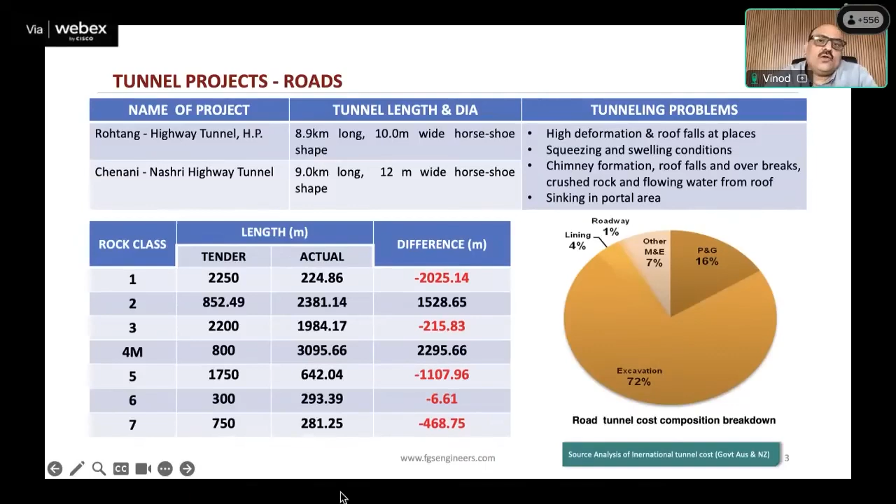Now relating this to road tunnels, if you look at the pie diagram, again from the international tunnel cost studies done by the Government of Australia and New Zealand, you'll see that the tunnel excavation cost here goes around 72%.

The difference between a railway tunnel and a road tunnel is that the railway tunnel has a comparatively much smaller excavation area required, because the cross-section size needed for a railway tunnel is much less than for a road tunnel. Hence the excavation cost percentage is around 54% for railway tunnels. But the complexities and challenges in tunneling remain almost similar for both rail and road tunnels.

In this video, you saw that as the flow was happening very fast, the lights and equipment had to be moved and cut off. Now I just want to show you the same site after rectifications were carried out.

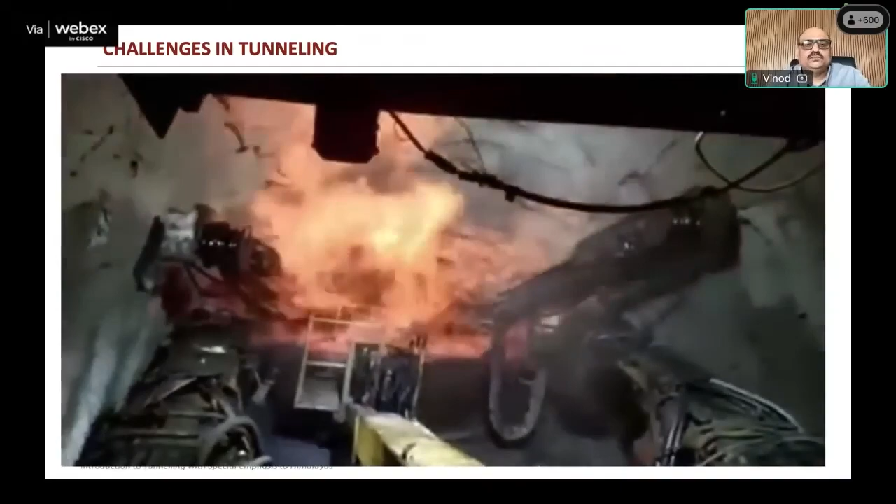Okay, so if you have seen the last three slides, what comes out of these slides is what you are going to get inside. It can broadly be anticipated, but to really infer exactly what is going to come out is very difficult.

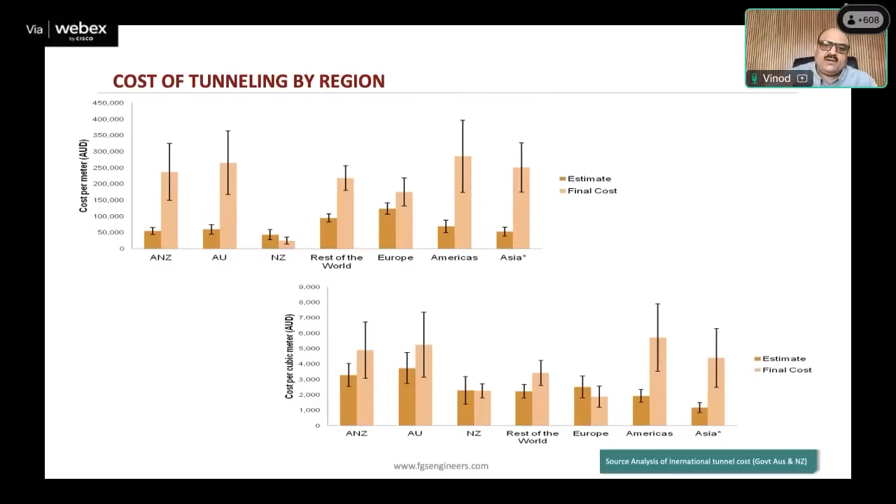Yes, if you look at the graph, this challenge is higher as far as Asia is concerned, and it is comparatively less in Europe. The reason it is less in Europe is that Europe generally has a stable geology compared to what geology you have in Asia. But all across the globe, the pattern is similar.

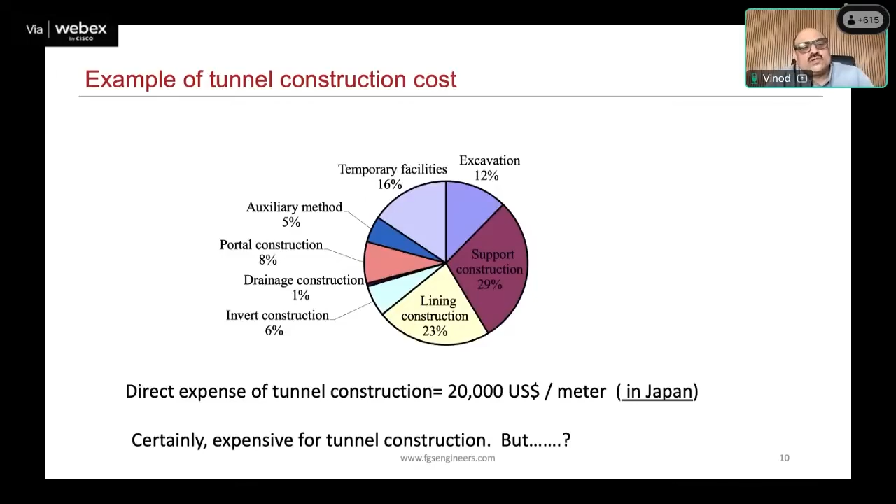Now, this is another study done by the Japanese under JICA, where in Japan they had come out with the distribution of cost. If you look at the pie chart, you will see support during construction and lining during construction. These two are the major costs which contribute to tunnel construction, going above 50%, and the rest of the costs again account for around 50% on the other side.

Now, advantages of tunnels: it definitely brings out better efficiency, environmental impact, safety, weather protection, economic benefits. I don't want to get into detail because this is something which all of us who have joined this webinar are aware of, but these are the advantages which a tunnel brings out in comparison to any other infrastructure solutions.

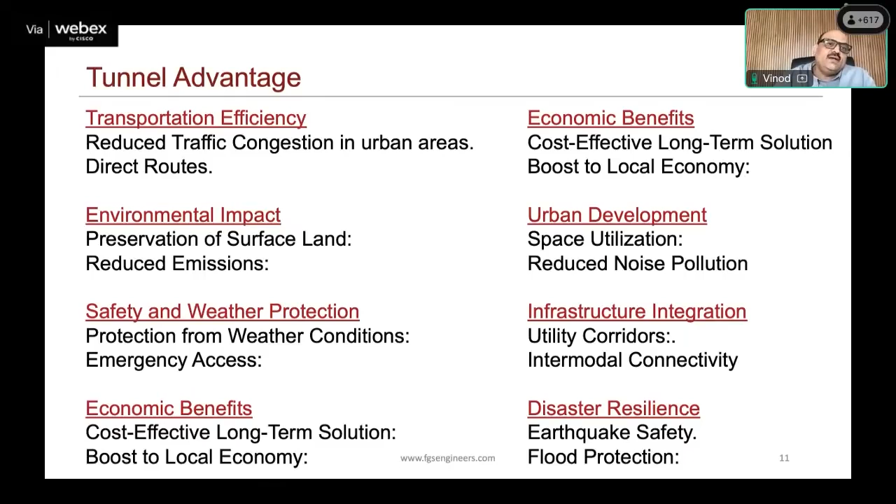Now what I want to get you to is the cost implication of tunnel vis-a-vis road. This is a study which was done in Japan, funded by JICA, and the rates are not factored to today's cost, but it gives you an aspect of how a tunnel cost and a road cost can be compared.

Now, if you look at them, they have costed for tunnel from both aspects, or road from both aspects. One is the cost of construction, second is also the cost of accident, loss, time loss, money, on account of some aspects which are intangible. So based on that, if you look at cost, the total loss which they have estimated is because of running of the road, money for running of the road, extended.

In mountain road, it estimates around 57 million, whereas in tunnel, it reduces down to 15 million. Whereas if you look at construction cost, tunnel construction cost is much higher than road construction cost, almost more than double. And then you have a larger cost for repair of disasters in case of road, and lesser in case of tunnels. And similarly, if you look at the total cost, which comes down to around 19 million, and for tunnel it comes to 43 million.

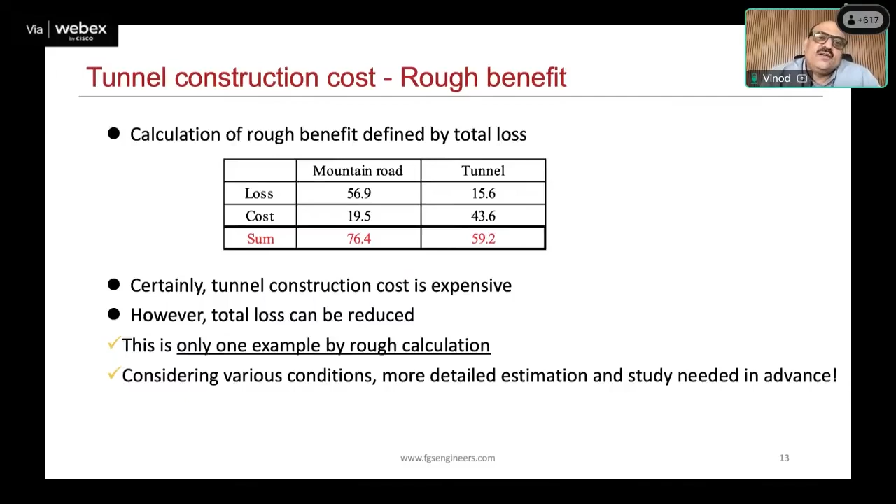But if you look at tunnel cost in mountain areas, you save a lot, especially in areas like, let us say, Rohtang Pass tunnel, where you have to climb around 46 kilometers on high hills, having snowfall, rainfall, landslides on those roads, and regular maintenance. The cost in mountain tunnels vis-a-vis a road, you can offset almost to the same. So in places which are having a lot of landslides and a lot of challenges, the cost of having a tunnel is generally offset by the rest of the risks which are there.

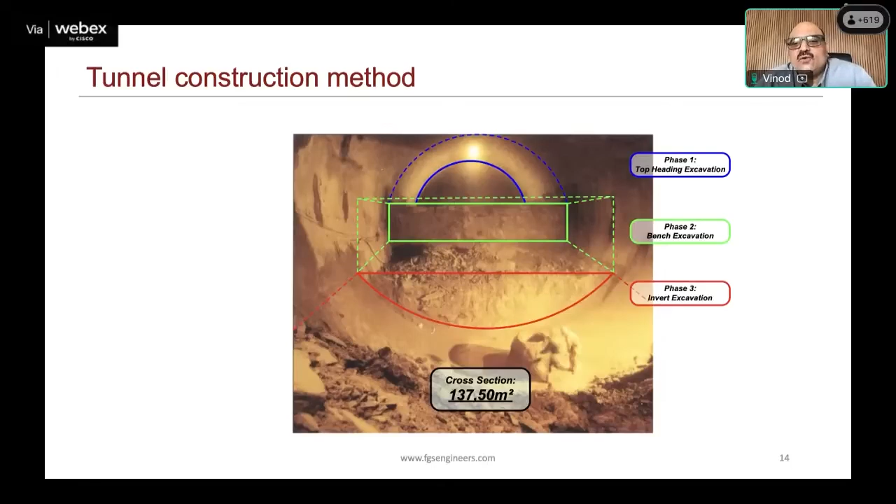If the tunnel diameter is small, as it is in railway tunnels, and it is supported by the geology, then we go for a single excavation. But in our present tunnels coming up in expressways, where the diameter of tunnel is huge, this is how we excavate them, especially when the geology becomes poor. It is divided into 3 parts. The blue part shows the top heading excavation, done in phase 1. Then in phase 2, bench excavation is carried out, and in phase 3, invert excavation is carried out.

Now we'll go over to the various terminologies. Advance, most of the civil engineers will understand. It's how we move ahead in a day. It can be in one work cycle or in 24 hours. So that is the advance you take when you excavate a tunnel. Adit, it's a word which has come from the hydro sector. It is access divergent to intake tunnel.

Commonly, when you have longer tunnels, let us say tunnels of more than 5, 8 or 10 kilometers, the tunnel has only 2 faces for construction, at both the portals. Now, if you start constructing a tunnel 10 kilometers long from 2 portals, it takes a lot of time for the construction to get completed. So in order to have more faces, adits are taken into consideration. So that is access divergent to intake tunnel.

Then is cover, a very critical aspect in tunnels. The cover is above the crown portion, or the roof. Whatever distance we have up to the mountain top, that is the cover, and that's the vertical cover. Similarly, in tunnels there is one more aspect, lateral cover. When you are driving a tunnel through a mountain, you should also be very concerned about the lateral cover you are getting. Otherwise, your tunnel will get exposed and the whole thing will collapse.

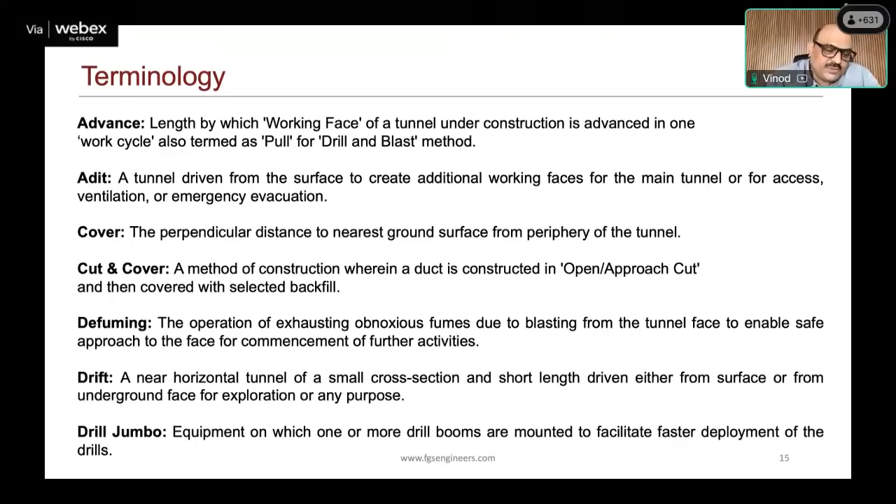So generally, because of the cross sectional area, when these equipments are selected, the decision of the contractors is not only the using of this equipment for a particular project. They also look into the employability of these jumbos for their upcoming projects or maybe the future projects. So that is one of the aspects which is taken into consideration.

Then we have egress. These are the small tunnels which are parallel to the main tunnel, and which we generally, in a common terminology, call escape tunnels. So there are egress tunnels. Then heading benching, I've already explained. Mucking, very simple thing. After blasting, when you take out, that's the mucking. Then you have shaft. When you have longer tunnels, ventilation becomes a problem, so you have shafts there. Then you have shotcrete. This is a type of concrete, for people who are not associated with the tunnels. Shotcrete setting time is very, very fast. The initial setting takes place within 2 or 3 minutes. That's how fast it sets.

The next important thing in tunnel is stand-up time. All these terminologies we'll be using ahead in our presentation. Now, stand-up time is the time once you excavate a tunnel, you have done a drill and you have done a blast, you expect the geology or the area to stand up for a certain time. So if you have a hard rock, a basaltic rock, or a rock with higher UCS, you will find that the stand-up time of that area is higher. But if you come to poor geologies in the Himalayas, you will find that the stand-up time is less.

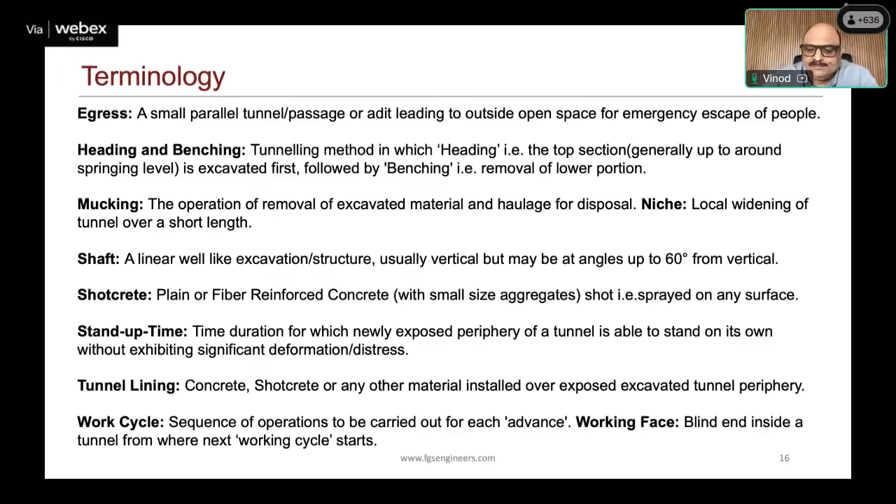Now, if you look at the excavation cycle of tunnels, initially you start with drilling and blasting. As you can see on the slide, it is followed up by cleaning it, and after drilling, you charge everything, and finally you get ready to blast. Now, charging and blasting is a separate intense subject which requires to be focused.

In a number of places, the pattern of charging and blasting is left to laborers, or left to a single man who really has no great experience. But charging and blasting is one of the critical factors which are to be taken care of, especially when you are doing your portals, and later on if you do not want overbreaks.

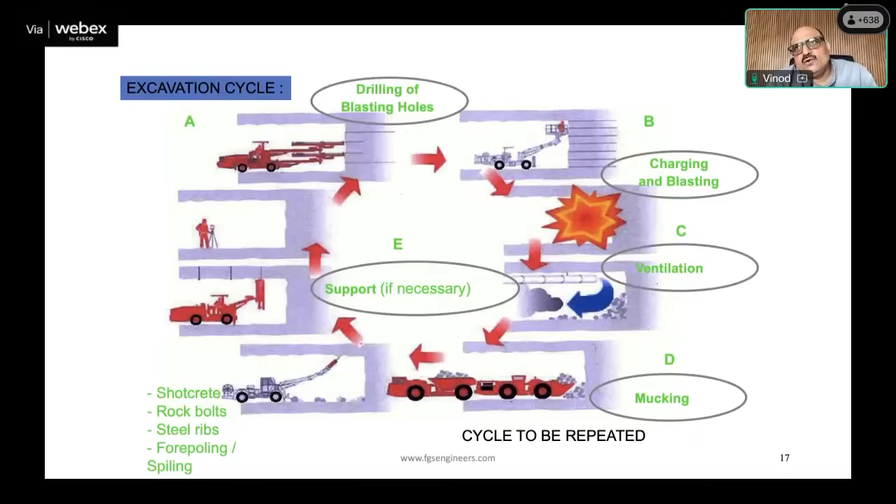So these are the reasons why TBMs are generally not preferred much in the road sector compared to NATM or drill and blast. Now, in terminology, I had told you there are two things we do in tunnels: one is primary support, and second is the final lining. In primary support, these are the methods used: wire mesh, shotcrete, rock bolts, steel ribs, forepoling, pipe roofing, dewatering, and chemical grouting.

If you look at this cross section of a tunnel, and you look at the heading, all the straight lines you see are the rock bolts which are used. Once you have excavated, you are supposed to put in the lattice girders or the I section ribs, and then you use all the supports we are talking about here: wire mesh, shotcrete, rock bolts, steel ribs, maybe some of them, maybe all of them. This is how it goes through.

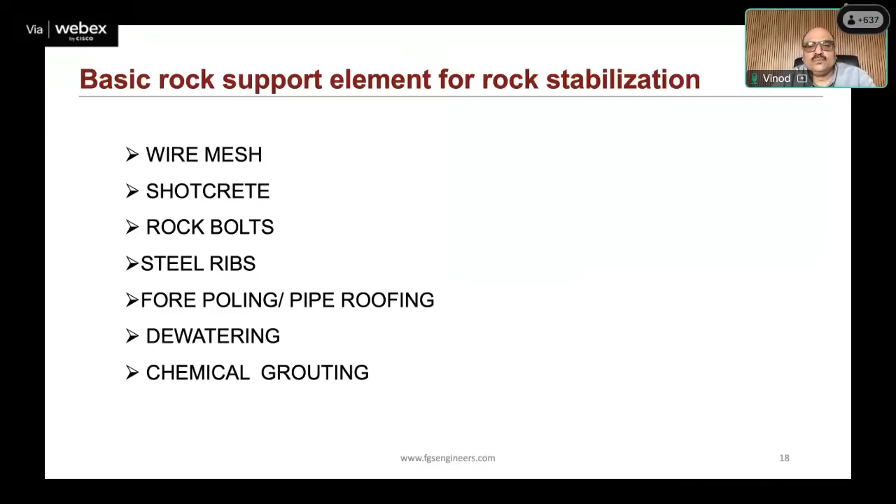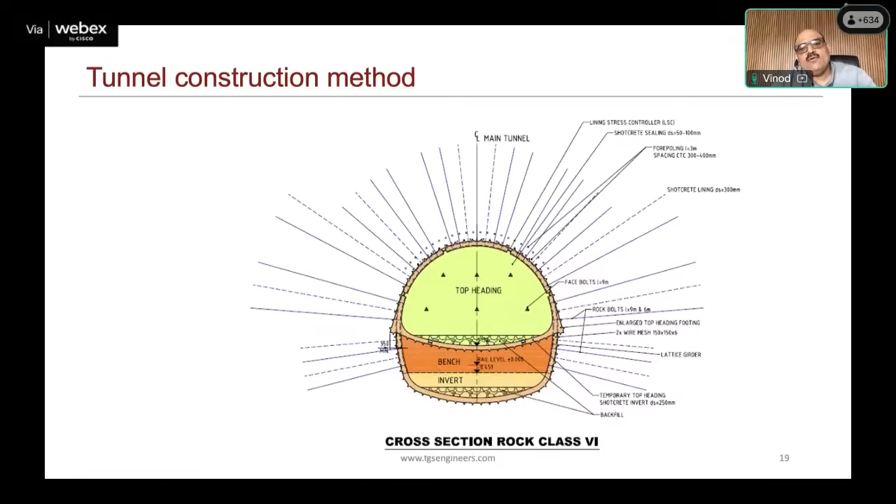Once you have completed, if the geology is very poor, then you require to close the ring. And once you have closed the ring, the whole area becomes stable. As you excavate below, you have to open the ring, close it again, and go to the bench. If the stresses are higher, you may also have to close the ring at the bench. Otherwise, you may be able to continue to bench and invert.

Now, if you look at the cross section from the longitudinal aspect, this is the tunnel face, and presently we are doing the top heading. You have to keep a space between the top heading and the benching, and then comes the invert. So generally, the process is you do excavation at the top heading and allow all the convergences to take place. You will install the primary lining, and once you have installed it, you will continue with your next cycle and go ahead.

You have to keep a substantial distance of at least 100 meters or so between the top heading and benching, because you do not want the stresses coming from the excavation here to immediately get transferred to the bench when you are excavating it. Generally these stresses can go as far as a distance of around 3D to 5D. Adding further cushion and working space, the distance between top heading and benching is generally kept between 100 and 150 meters.

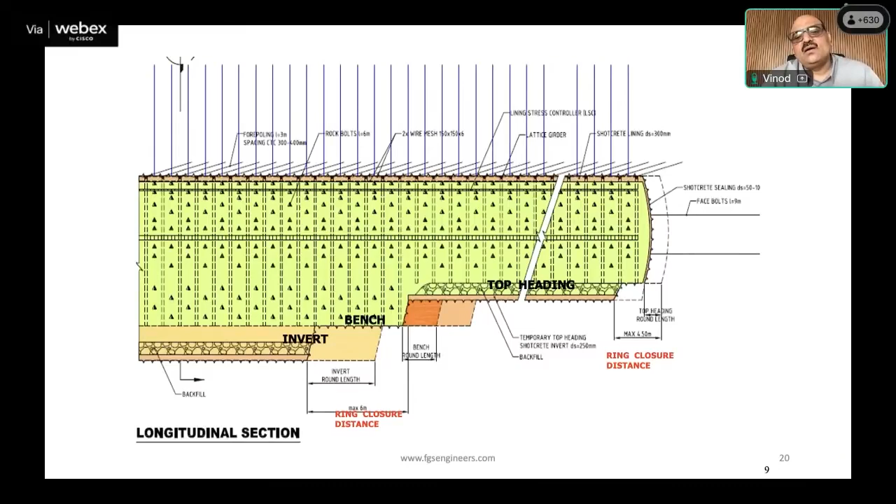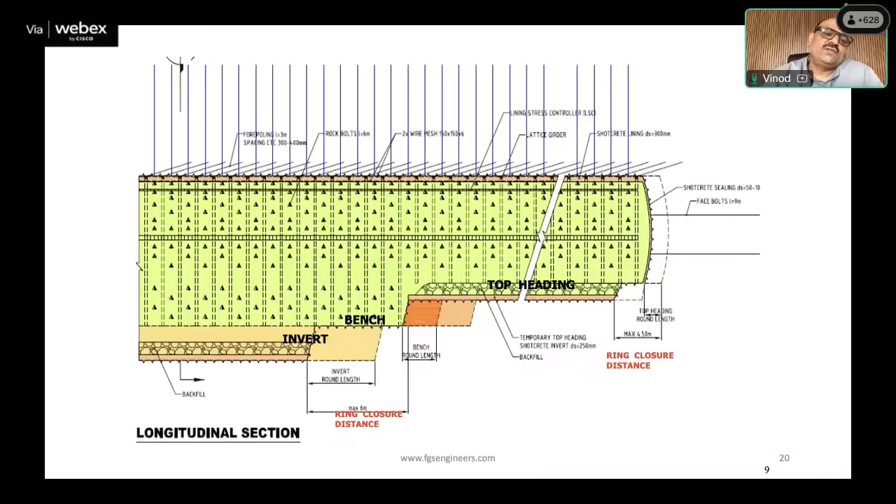Once you have done benching, the distance between benching and invert is not kept much. However, if the geology is poor here also, you may have to keep a larger area. The reason you are doing things almost in parallel is the amount of excavation in bench and invert is comparatively smaller than in the top heading. These activities are carried out simultaneously because you are aware of the geology and the convergences, and based on that data you decide whether you can move faster or slower.

Now, in some cases we have very, very poor geological conditions, and then we resort to supporting the area above the excavation, the crown area, either by grouting, by pipe roofing, or by fore poling. Now, what is the difference between all three of them?

When you say grouting, in some places we use a word called soilcrete. Basically you inject various types of material: maybe simple cement, cement and slurry, cement and slurry with microsilica fumes, maybe polyurethane foams. So you have to decide what you have to insert here.

The second thing people do is fore poling or pipe roofing. In fore poling, it's steel rods or rock bolts which are used. But in pipe roofing, it's 76 mm or 114 mm pipes which are used for supporting the crown. So this is how it is done.

Now, certain tips I want to give here regarding the crown stabilization. In a number of places I have seen that we resort to cement grouting. Immediately after excavation, we see there is a flow and we start cement grouting. In a number of places, what happens is if you do cement grouting, it further adds on.

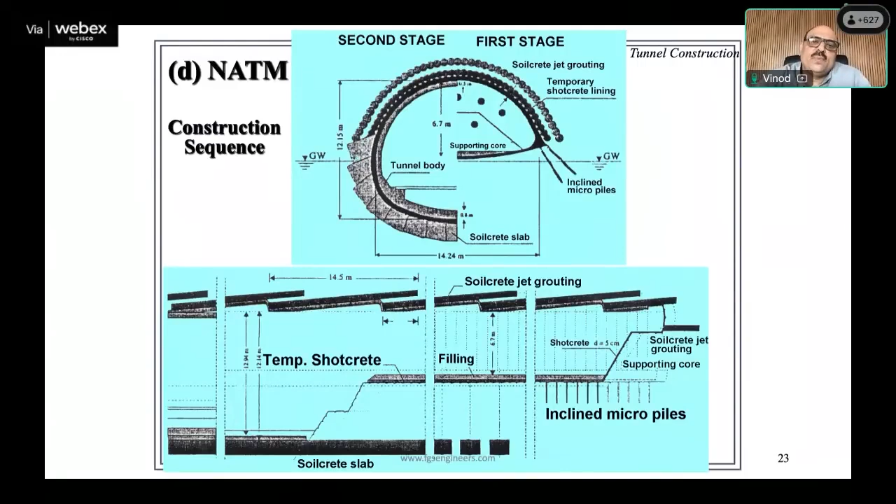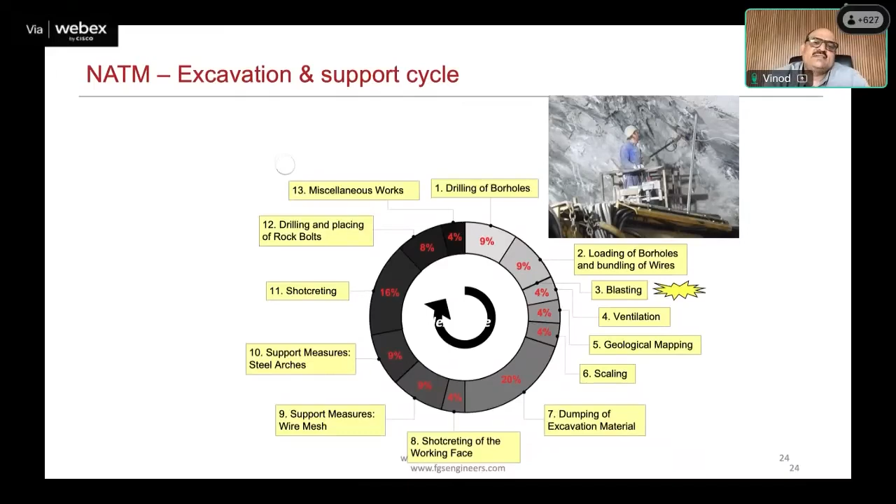And then again, if you have to do another layer of shotcreting, drill rock bolt placing. So all these percentages are given. These are very rough percentages. Don't take these as exact figures, but these are generally tentative times which will be used in a cycle of working.

Now we come to how do you do road tunnel planning? The first thing which will come is the decision of road type, whether the road is passing through a city, urban, or expressway. That is one of the basic factors, because it leads into a big issue of cross-sectional area, and that cross-sectional area requires to be supported. So the decision has to be based on that.

Then you come to selection of tunnel routes on a large scale map, where you look at topography, geology, climate, environment. Whatever I'm going to talk, I'll also be presenting at a later stage in this same presentation in a case study. You compare various tunnel routes, you finalize the tunnel route, and then you start execution of drawings and various investigations. Why is this important?

A number of times when we get into interactions with various officials, we find that there is a dichotomy in understanding at what stage what is required and how it is to be approved. Because one of the challenges is that investigation cannot happen in a tunnel unless you finalize the alignment. Once you have finalized the alignment, only on that particular alignment can we have investigations.

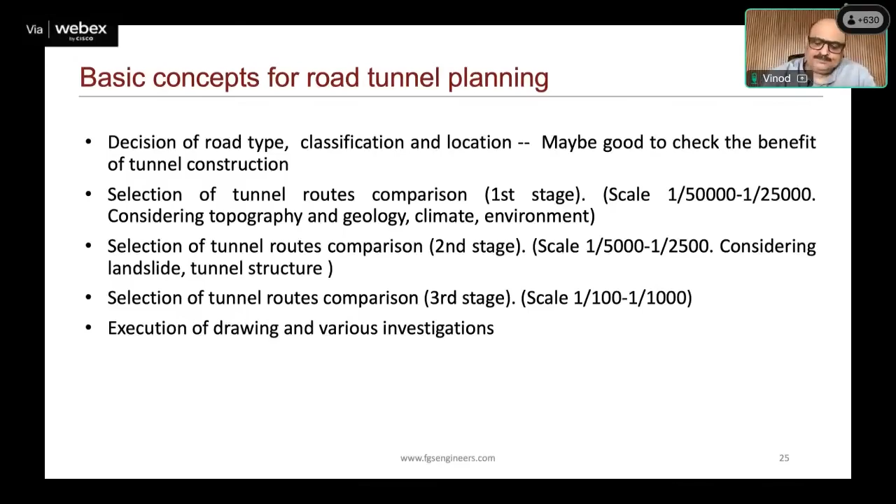Now, when we talk about this, we'll slightly elaborate on alignment selection. The factors which are going to impact it are geological, geotechnical, hydrological, and environmental. These are some of the primary things.

Now if you look at geological and geotechnical considerations, world over, the amount spent on this varies to around 3%. In our country, the amount we are spending is approximately less than 1%.

Based on that 3%, even if you go to international standards and look at large tunnels like Gotthard, where 57 kilometers of tunneling was done, even there, in spite of all geological and geotechnical investigations, they had problems in two tubes running almost parallel.

So what I'm trying to say is, when you do investigation of even 3, 3.5, or 4% expenditure, imagine you have to interpolate something which is 95, 96, 97 or 98%, which you have not investigated. Drilling, which is the most important aspect of investigation...

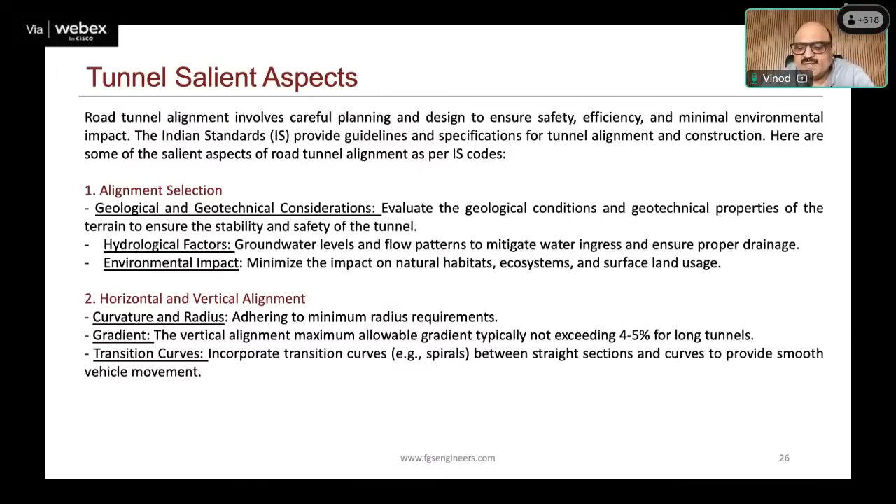Once that is done, then horizontal and vertical alignment - I won't get much into it because most of you are road people and you understand that. Then our next aspect is going to be cross-sectional profile, shape, size, and clearances.

Now, in tunnels, shape and size matter a lot, because they affect the way you will transfer the load. So if you have an arch formation, let's say you want an arch, you could go for a D shape or a horseshoe shape. These shapes are affected by the geological consideration because these are the shapes which are going to transfer the load. So if you have good geology, you may go for a particular shape.

If you don't have good geology, you will have to refine those shapes and refine your arches and come to that shape accordingly. So shape plays a very important aspect in tunnel design. Size is beyond our control because whatever purpose the tunnel is made for, you require those dimensions and clearances. So sizes are generally fixed, but shape is an important factor.

Whenever we do a DPR or plan a tunnel, this aspect can increase or decrease your cost in the support system. So once you are thinking about shape, it's not like you just take any cross-section profile and use the same one everywhere.

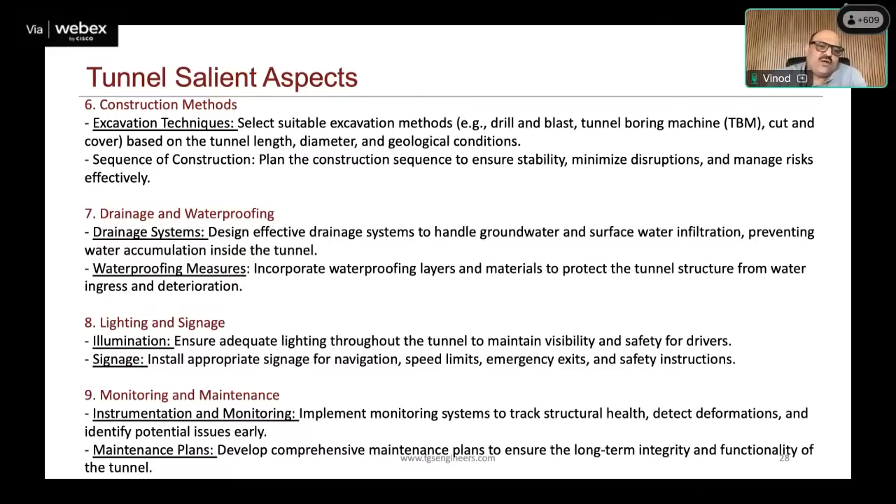The next aspect is drainage and waterproofing. I will show you this with some slides later, so I won't discuss it much here. Lighting and signage, and monitoring and maintenance, are other factors to be looked into.

Now, flow of investigation—I think we can go ahead from this slide. Now we go to geology. Geology is one of the major aspects in tunneling, and the biggest part of geology is that there is no exact numbering or value.

Let's say when you design a building and talk about loads, you have an exact figure: this is 10 ton, the live load is going to be this much, and overall this load is going to be this much. But when you come to geology, things are in bands.

They depend on a material which is anisotropic. Anisotropic means the way I look at the material versus the way you look at it, and the direction each of us views it, will define that material differently. If I see a geology from a face and you see it from another angle, the incline of slopes and everything will be a different dimension for you than for me. The impact of those joints, if you tunnel in a different direction, will have different implications.

If you look at the same rock properties from front and behind, or different angles, different geologists will arrive at different figures, and these figures will generally be in a band. So geology interpretation at this moment—the material you are handling—is something like that. That is one aspect we have to understand.

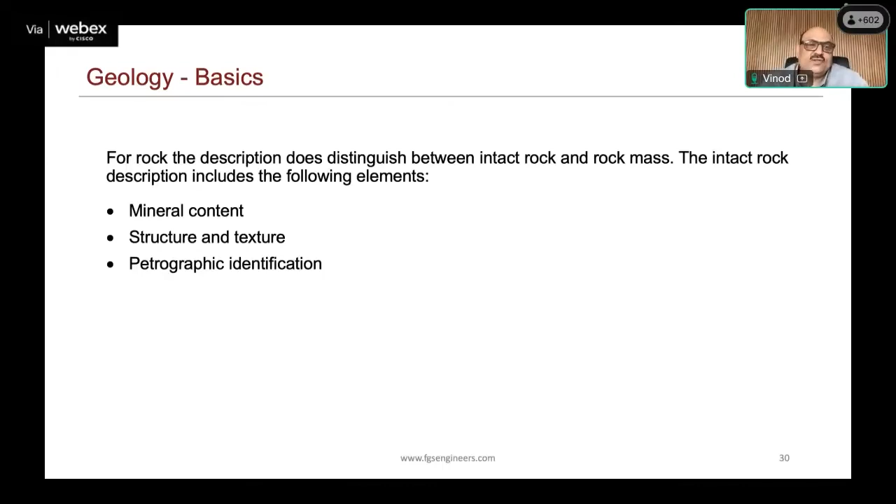Geology depends on mineral texture, composition, joints, their properties, patterns, and density. When you combine all this, you get a rock mass, which is supposed to have a certain amount of inherent strength, which you further support and then build a support system. That's how the whole thing moves.

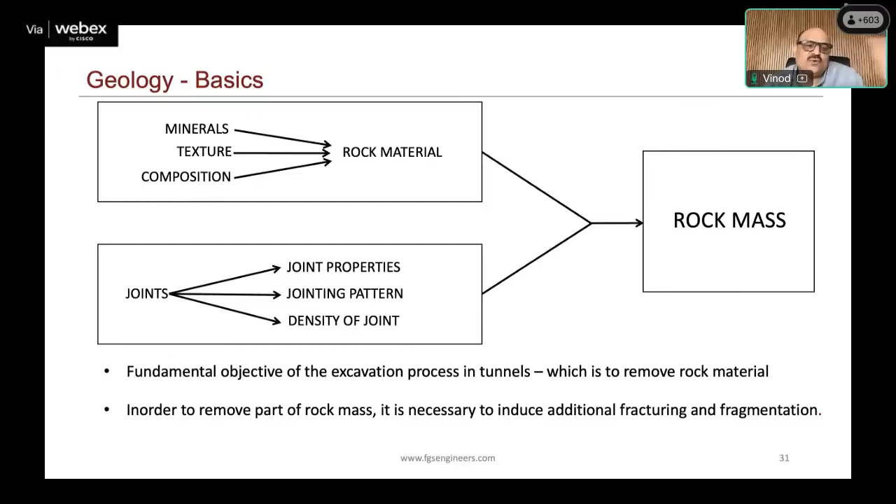These are some terminology which we use in tunnels: hard rock, soft rock, or soft ground. When you come to soft ground, then you say raveling, firm, fast raveling, slow raveling. So there are standard terminologies which are used when you define it. Generally, you will find that the definitions themselves are very complex. So there are standard ways of talking about geology.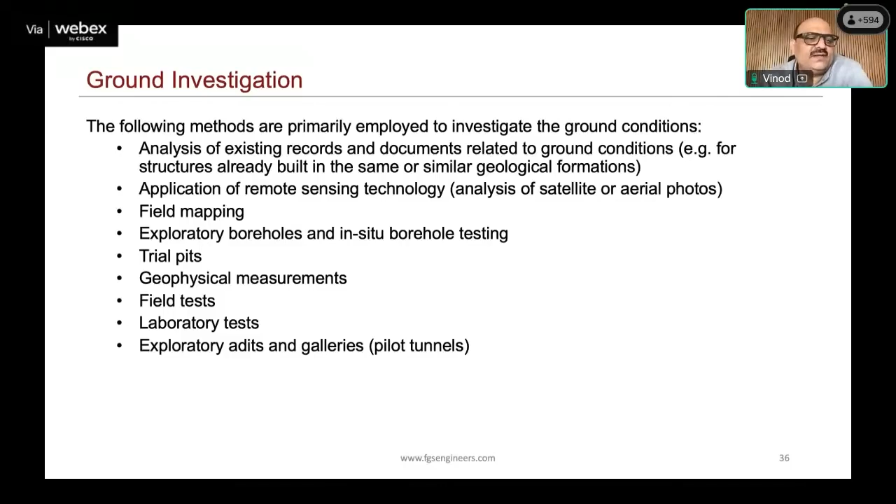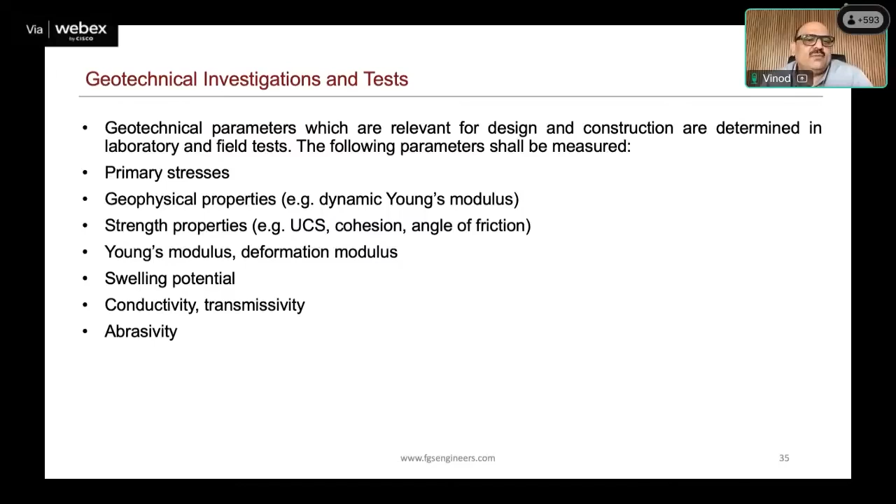Now, these are some of the primary methods which are presently used. We have field mapping, exploratory boreholes, trial pits. Then there are geophysical methods, ERT, SRT. Then various other cross borehole tomographies. All those things are done. Then field tests are there, laboratory tests are there. When you do all this and get the details from this investigation, you are able to put everything in a software and come out with designs.

Now, if you look at our IRC SP 91, the present 2019 version, it is under revision. This is what it talks about in tunnels. This is an advisory which is given. In a number of places, we take it that this is where you have to do it. See, before you do a borehole, you should have completed your primary geological mapping. You should know where your geology is changing, where your faults are, and the places from where you have to extract data, so that you can make an L-section which is going to be of use to you.

Let us say we start a tunnel, and within 50 meters of that tunnel, at 1/4 of the tunnel, we have a fault. Then from that fault to, let us say, half of the tunnel, we have the same geology. So now I require an investigation at the portal, and I require an investigation at the fault.

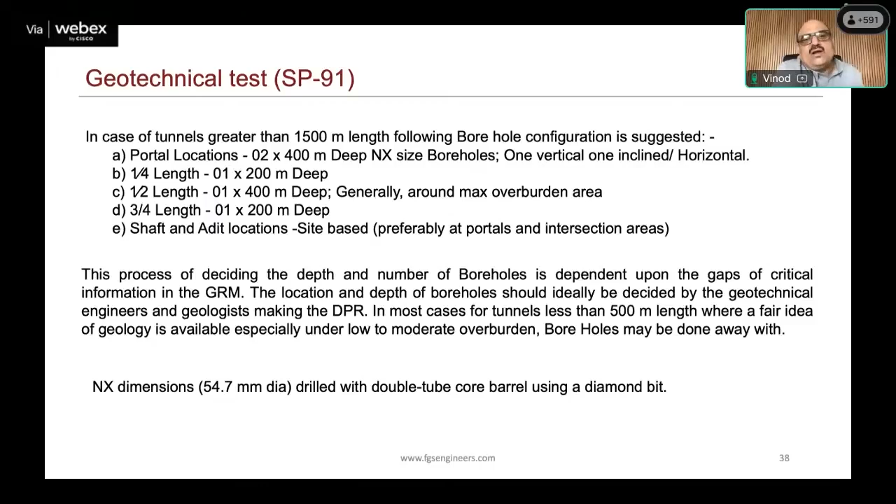So what I'm trying to say is, initially map that area, taking out the details from the Geological Survey of India: what tectonic activities were there, how that formation is, understanding that whole thing. Then you have to plan your investigations. So the investigations in case of underground work can never be mathematical. That's the point I want to drive here.

Another aspect I want to come to is the various types of drawings: conceptual, preliminary, tender, final. There is a lot of confusion; people feel that the tender design or preliminary design will be the final design. Imagine this with anisotropic conditions, and you are not aware of the whole tunnel. Now your investigation is 3%. You can't have a final design from 2% or 3% of investigation. As you go, you will have to change.

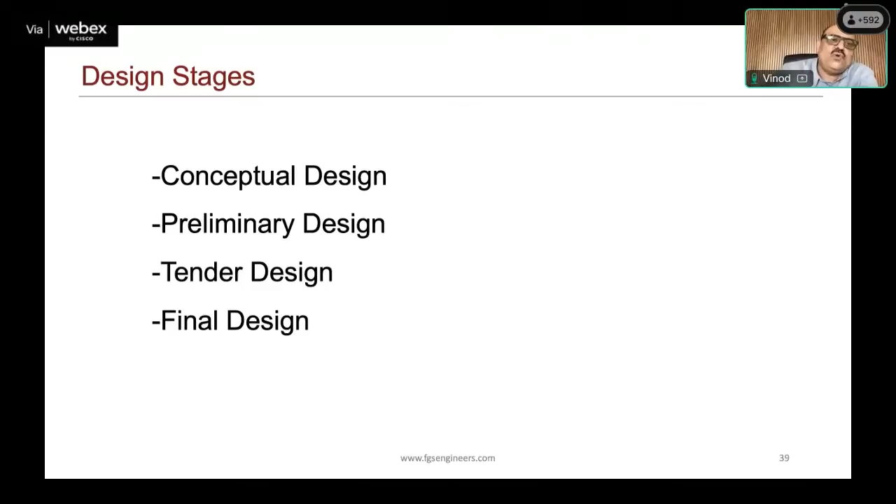Another aspect is tunnel classification as per SP 91: 500 to 1500, and long tunnels are generally taken as above 1500. Now, unfortunately, we do not have a division of tunnels into urban tunnels and rural or remote area tunnels. And all our calculations, for example when you have to give escape tunnels, are based upon very conventional European methods which we have used in India. We have yet to Indianize them.

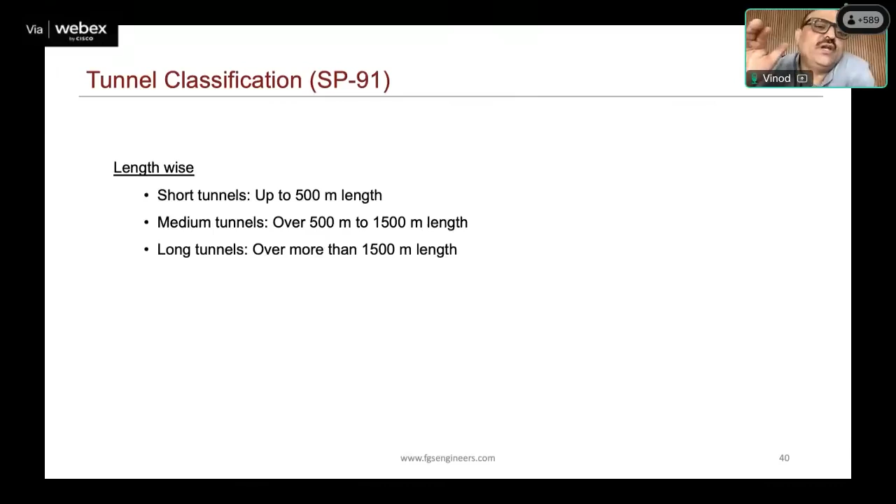We will just bypass this and go over. Now, one more critical tunnel design aspect is cross passages. Cross passages are either oblique or perpendicular, and IRC SP 91 gives you the option of both. It is easier for a contractor when you go at 90 degrees, and it is better in weak geology to go for 90 degrees.

But if you have a stable geology, then you should go for oblique, because it is easier for the flow of traffic. However, it is difficult for construction. So since the geology is good, you go for oblique. Oblique is convenient for the traffic but uncomfortable for excavation. If you go for perpendicular, it is easier to excavate, but it is uncomfortable in terms of geology. So that aspect has to be looked into.

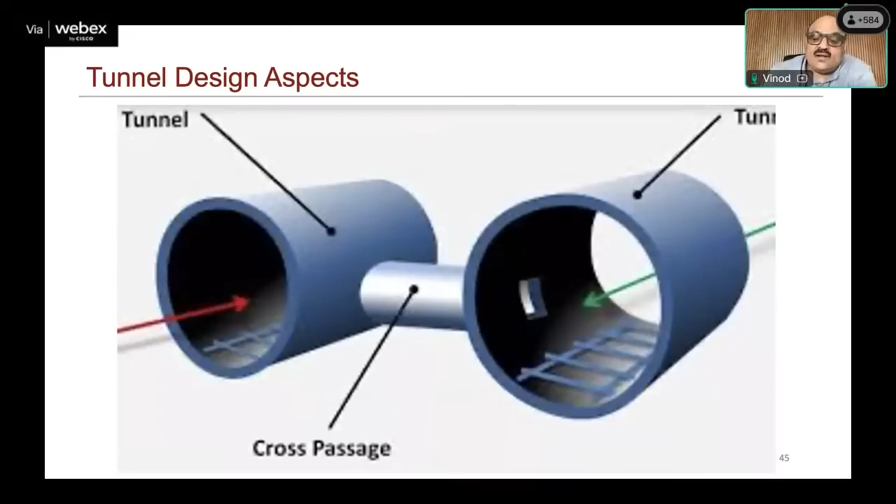The second aspect you have to understand is that in design there are various methods: analytical, empirical, observational, and numerical. The empirical and observational methods are generally based on research done earlier by Barton, Hoek, etc. They studied a number of tunnels and based on that came up with the support system. Now we are into the numerical method, where you do numerical analysis and then come out with a support system.

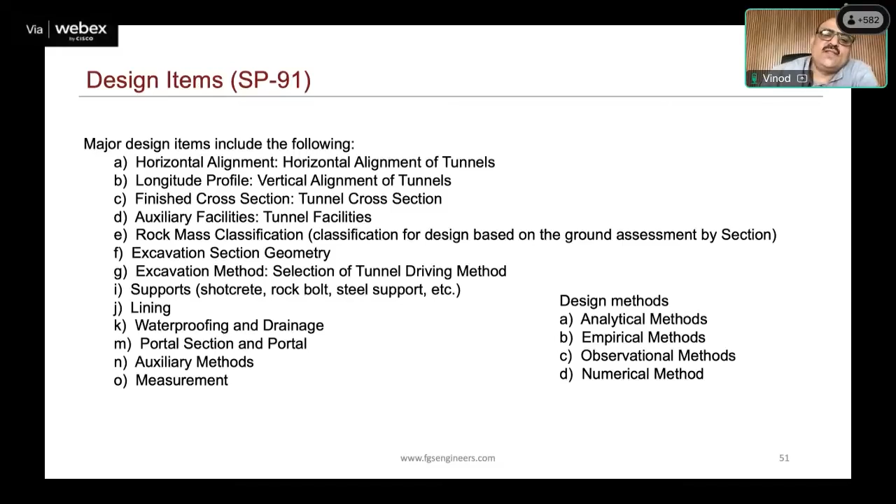If you want to segregate the traffic of the road and the traffic on the footpaths, it is better to have railings dividing them than to give a height to the footpath. At this moment, a number of tunnels are still being designed with that.

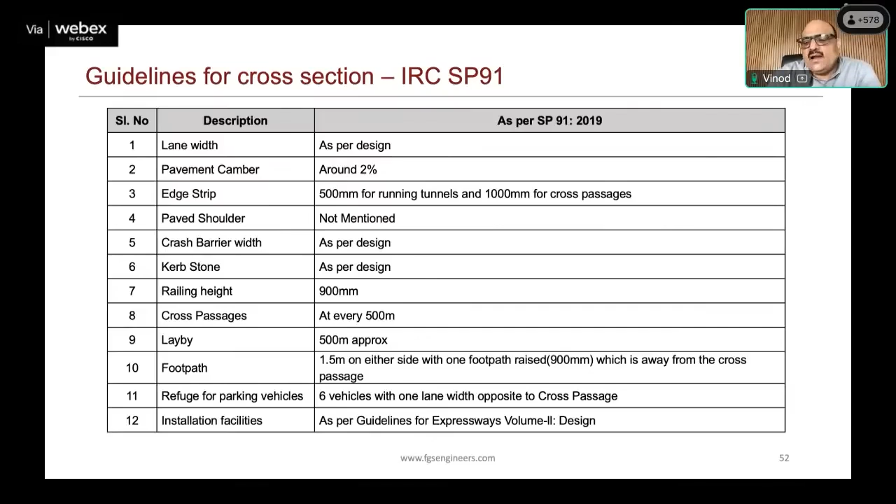Another aspect is cross passages at every 500 meters. This is the point which decides beyond what length of tunnel you require an escape tunnel, because as per SP 91, or even internationally, they say that in case of an incident one should not be made to walk more than 500 meters. So that parameter means that if it is a 1 kilometer tunnel and there is an incident in the center, you have to walk 500 meters and you are out of it. So that is the reason that beyond 1 kilometer you have escape tunnels coming in.

Why I'm showing you this is that during the design stage you have to resolve this planning and come to a conclusion on what you want to do. And if you relate this again with traffic capacity, whether you want a single tube or twin tube, these are the factors which are taken into consideration to decide that.

Another important aspect is drainage. If you look at drains in tunnels, you have to take out the water. If you look at one of the major tunnels we have, connecting Srinagar, Qazigund, Banihal, you have drainage planned in the center, and because you have planned drainage in the center, meaning in the carriageway, you have manholes with manhole covers on top, and traffic is flowing over that, which results in a lot of wear and tear of those manholes and the areas there.

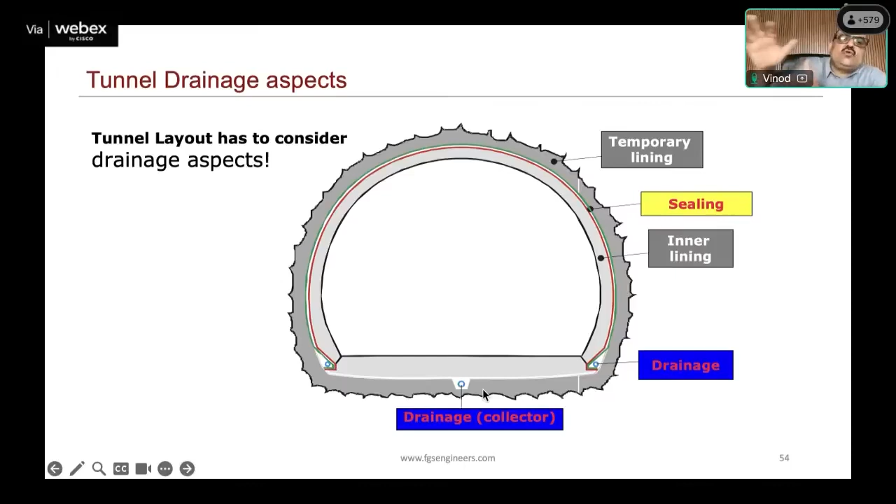The recent international concept is that your carriageway should be totally free of any manholes or covers, and you have to shift the drainage towards the sides, and whatever you want to take, you take down, but there are no manholes and no manhole covers. This is how the drainage aspect is looked into, and this is how the water is taken on the side. This is the old concept; this is a railway tunnel, so it's the old concept of a railway tunnel. Nowadays, if you require any additional water to be connected, you connect it to the main tunnel. There is no manhole, nothing on top.

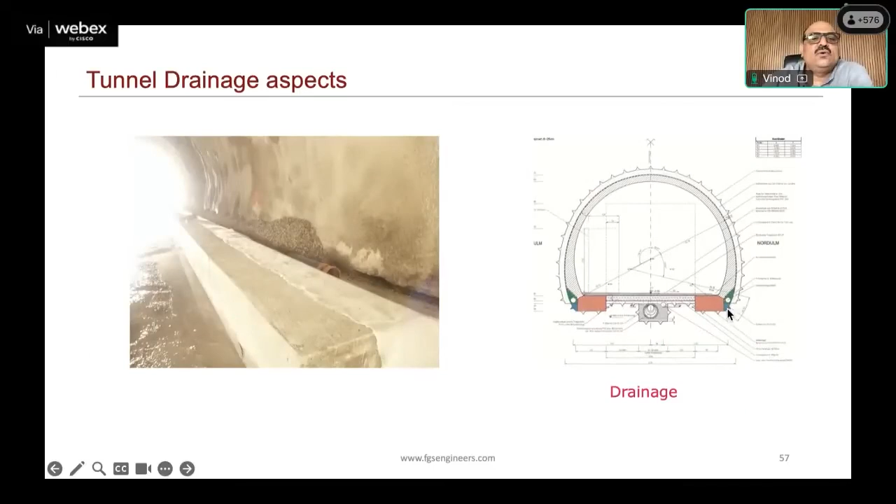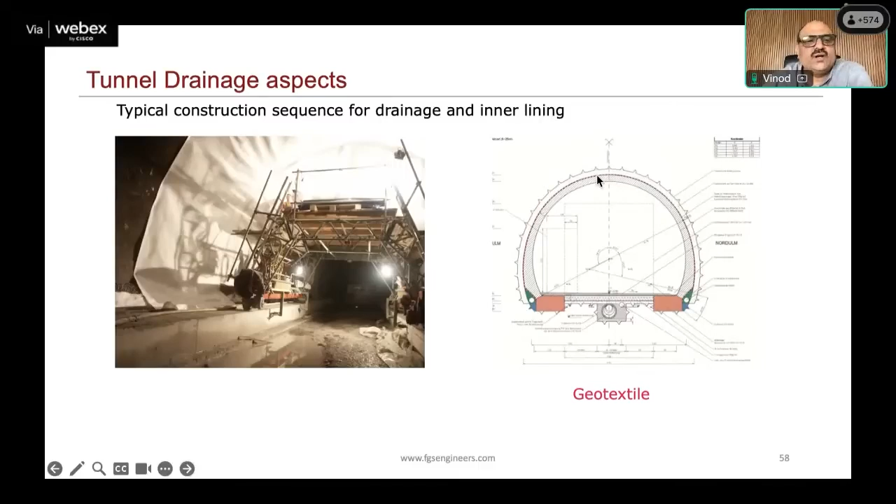This is how its excavation takes place. Whatever you see in orange, initially you make an abutment. Now you see the green portion; you make that, and the no-fines concrete and everything is poured. After that, you have this waterproofing membrane, the darkish red dotted line. You construct that, and once you have fixed them, you straight away go for your final lining.

So when you do a tunnel analysis, you have to decide whether you want a watertight tunnel or a waterproof tunnel. A watertight tunnel will have absolutely no water coming in. In certain tunnels in our country, waterproofing has been done in only a certain portion and the balance of the tunnel has been left, and later the water flow shifts from one place to another, and then we have leakages in those tunnels, especially in Himalayan tunnels. I think one of our tunnels where we have this problem is Rohtang.

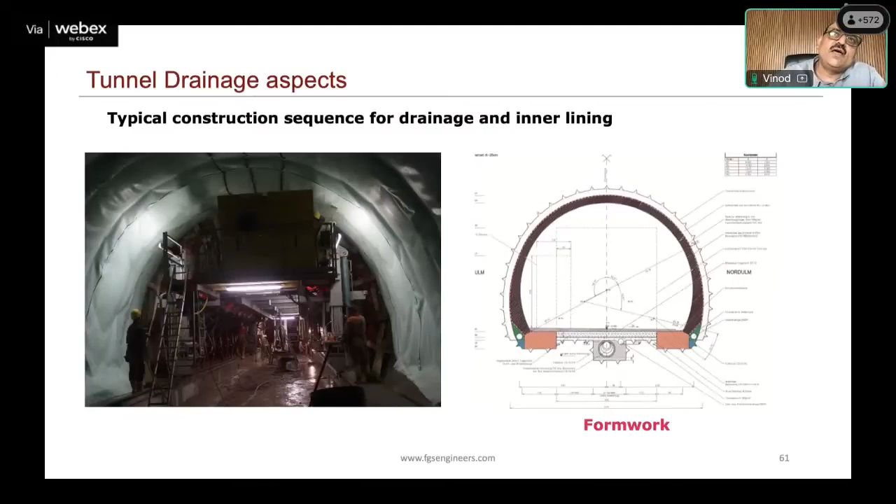There are softwares where you have to put it in, either DIALux or other softwares, and you have to get the intensity of light. You have to compare it. You have to look at the direction of your tunnel portal and compare that direction with the direction of the rising and setting of the sun, and based on that, the whole tunnel lighting design has to be done.

Okay. When we come to fire, at this moment there are a lot of debates going on, and people are talking about fires up to 200 megawatts. Generally, Europe has designed everything on 50. But when we come to India, we are still talking about 200 megawatts. The recent international codes have started reducing this fire load. So you have to understand the impact of fire loads.

Impact of fire load is not only in fire. The fire load has impact on the thickness of your concrete lining, and because of that it has impact on your excavation profile. So whole of this is related. It has impact on your construction cost and your maintenance cost. So when we look at tunnel fire aspects, we should be very clear what we require to do. And these are the present norms which people are going through.

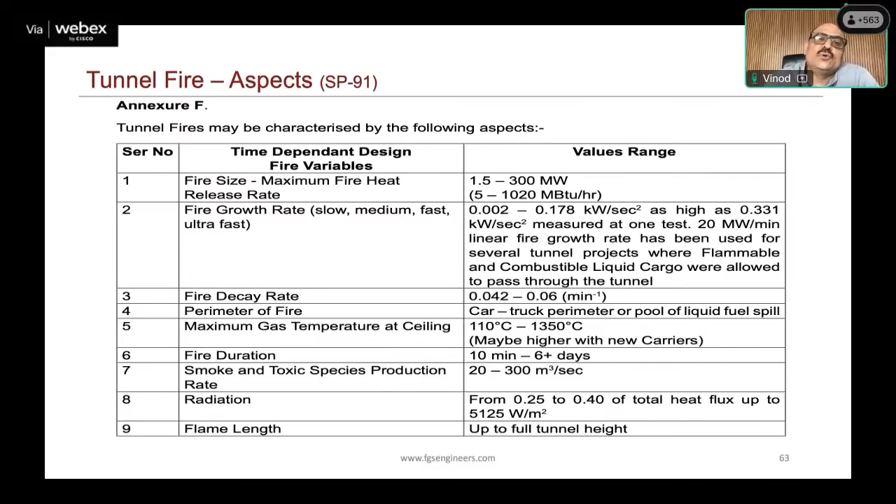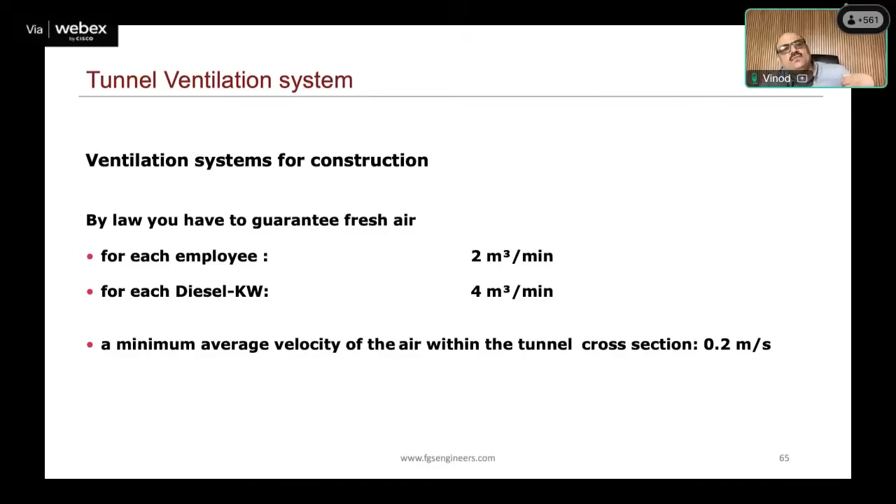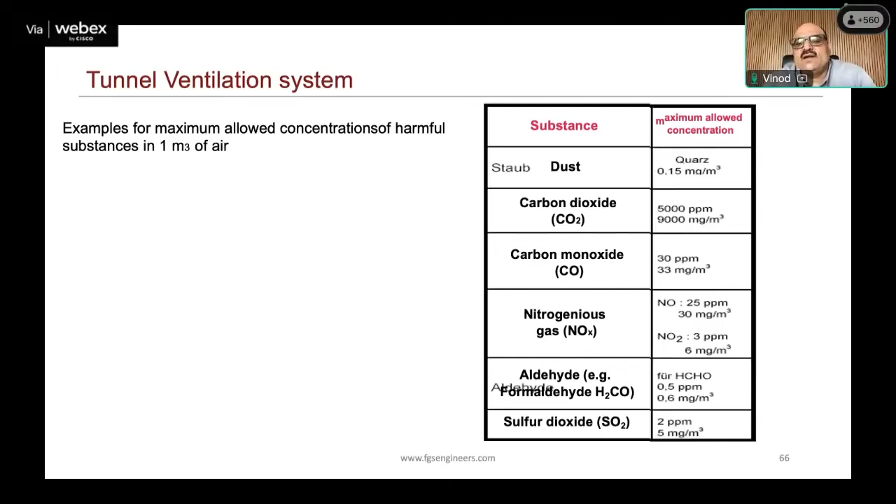This is how you plan during construction. You push fresh air through a ventilation pipe to where you are working on the face, and the extraction of fumes automatically takes place here. The concept is to provide fresh air to the people who are working at the face. That's the concept during construction.

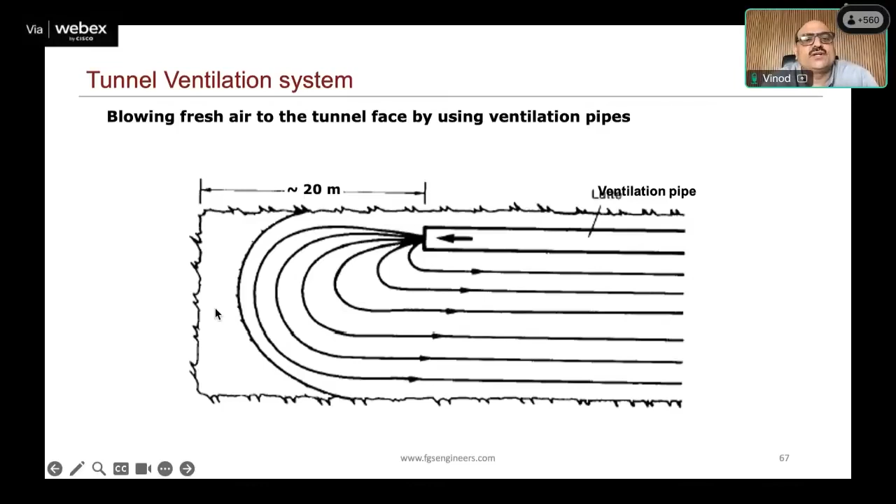During final ventilation, if your tunnel is too long, you have to think about shafts and how you plan the shafts, and you take out the gases. Cross passages I have already explained, so we move ahead from that. We have talked about this also.

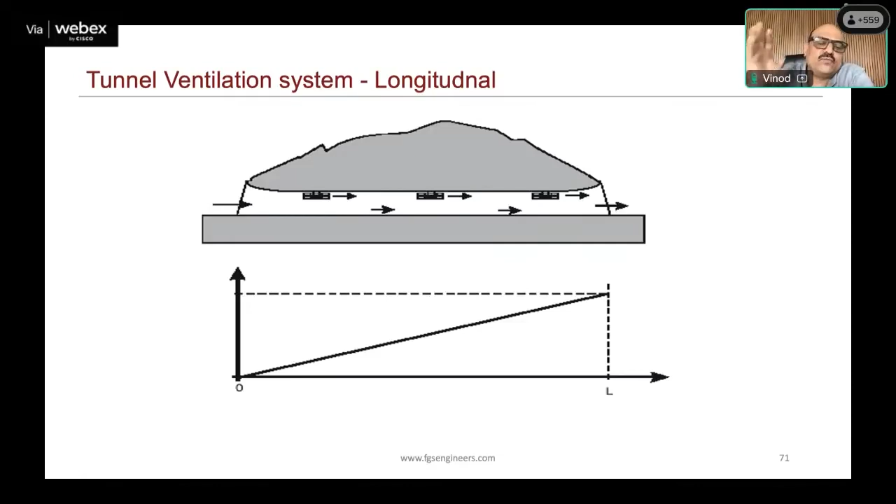Then in tunnels you have various types of ventilation. Longitudinal: you simply have fans, and you use a single direction of air flow. That's how the longitudinal ventilation runs. So you have a fan, and in one direction you have flow of air.

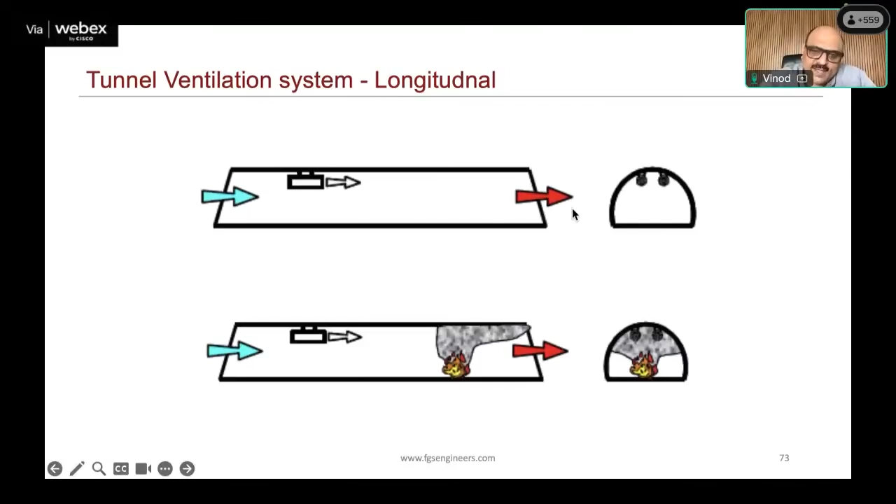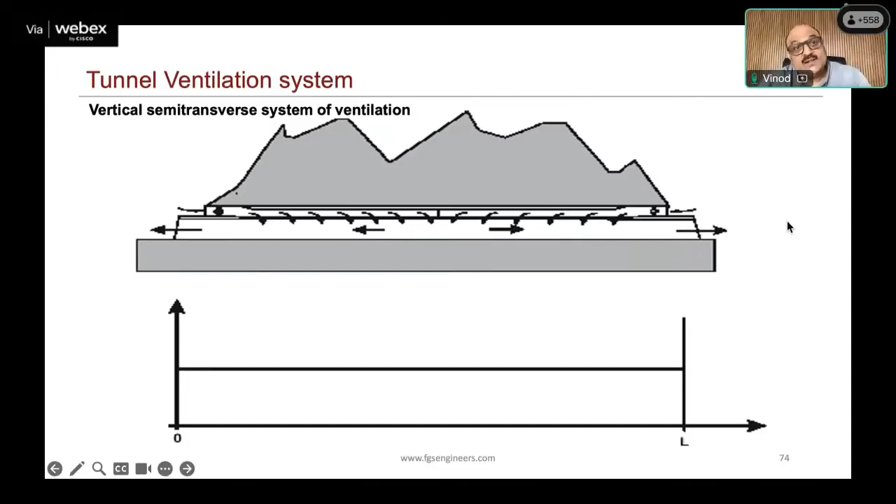But in semi-transverse, you have a ventilation duct on top, and from there you push in air, and you can take out the air from both the portals. That concept is called semi-transverse. In fully transverse, you have the concept of taking out the polluted air, and you also have the concept of pumping in fresh air.

So in the last two, the concept was to take out obnoxious gases, whereas in the transverse system you have the concept of pushing in fresh air as well as evacuating obnoxious gases. So this is a broad way of looking at longitudinal, semi-transverse, and transverse systems. This is in case you are using a shaft. The green line shows how the fresh air will come, and the red line shows how the obnoxious gases will be taken out.

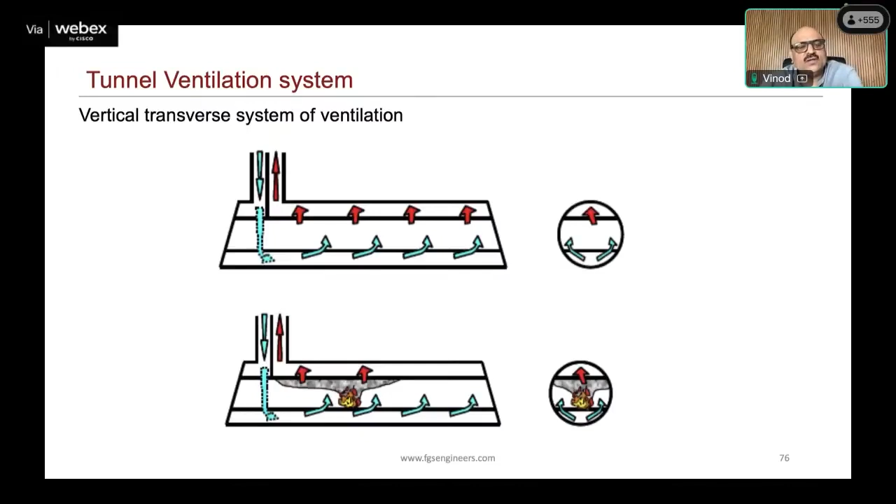Okay, now in another 5 to 7 minutes we'll finish this, and that will be the end of our presentation. We have already spoken about this.

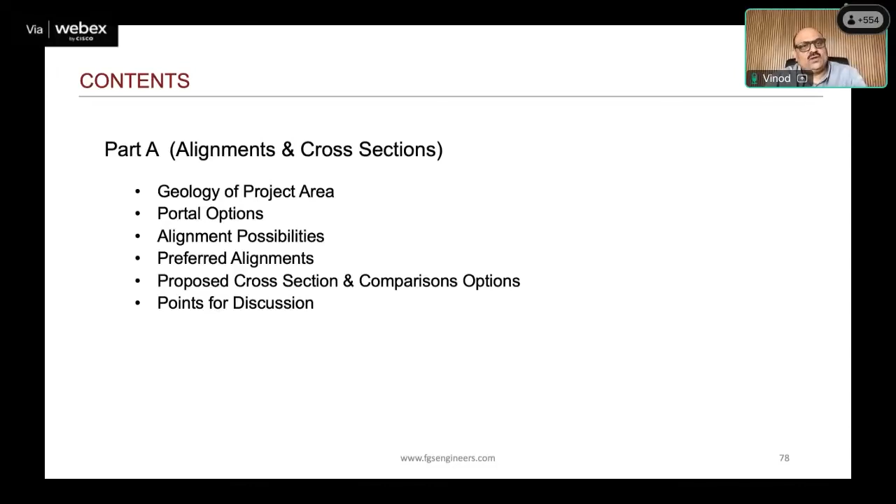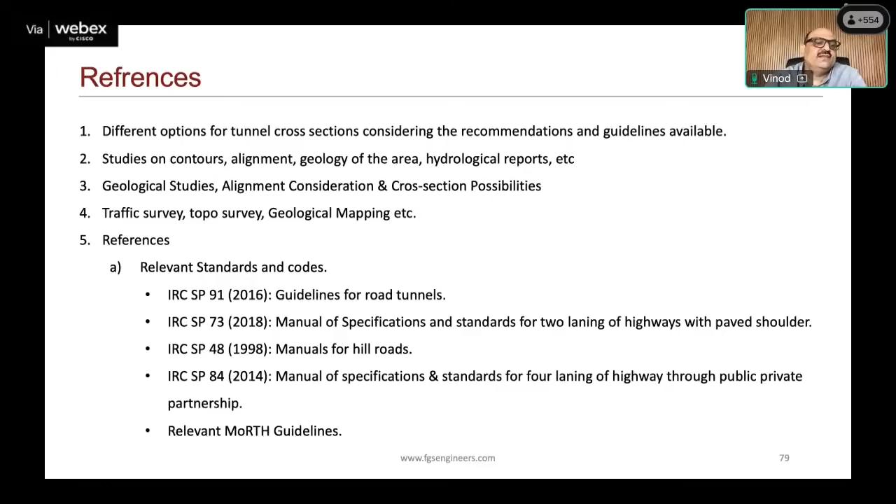So this is what you have to look at: alignment, cross section, everything. These are the various things you have to go through: documents, geological studies, topographic survey, and even our codal provisions. You have to go into around 3 or 4 codes before you finally decide what you have to do in a tunnel. IRC SP 91 leads it, then 73, then 48, and 84.

Okay, now when you are planning a tunnel, you should not plan a tunnel right below the fault. If you plan a tunnel below the fault, you will have more complexities to come in. If you have to encounter a fault, you should try to encounter a fault at 90 degrees, so that you have a fault only for the least length. So this whole study has to be done on the desk.

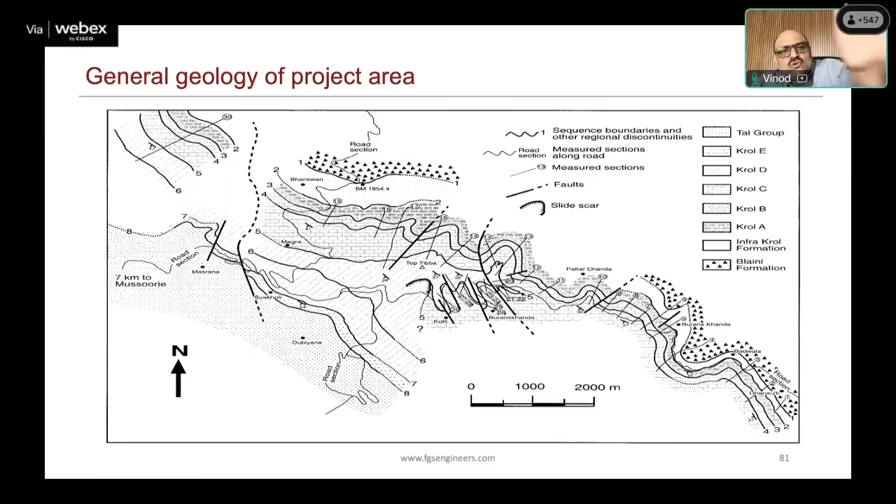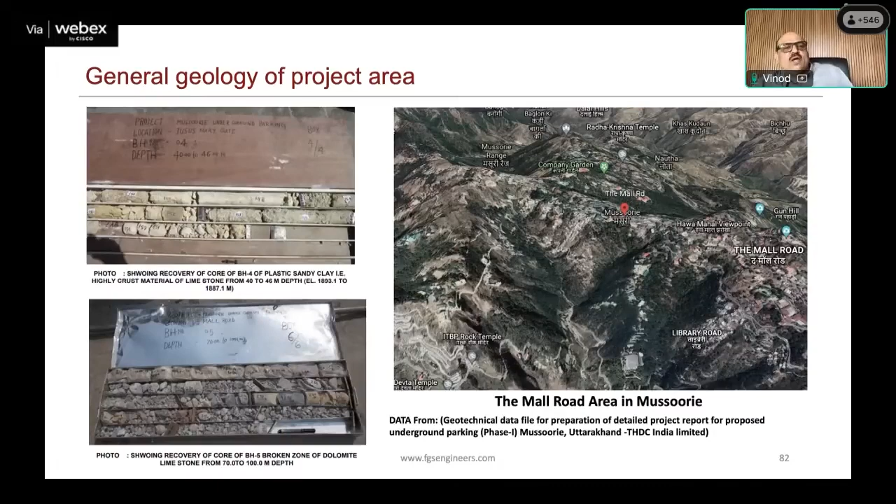Once you have done these desk studies, then you have to find out in that area what geology you had, what you did not have. All those have to happen. Then you have to mark your ridge line. We have to understand that our ridge lines are the most stable in that geology. That is the reason they have formed: there was a resistance, and that resistance has created the ridge lines. So those ridge lines are the areas which are the easiest to excavate.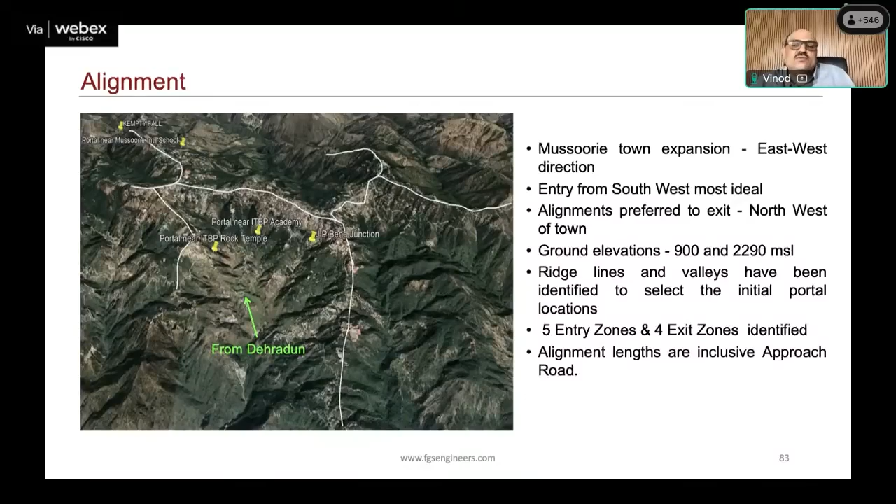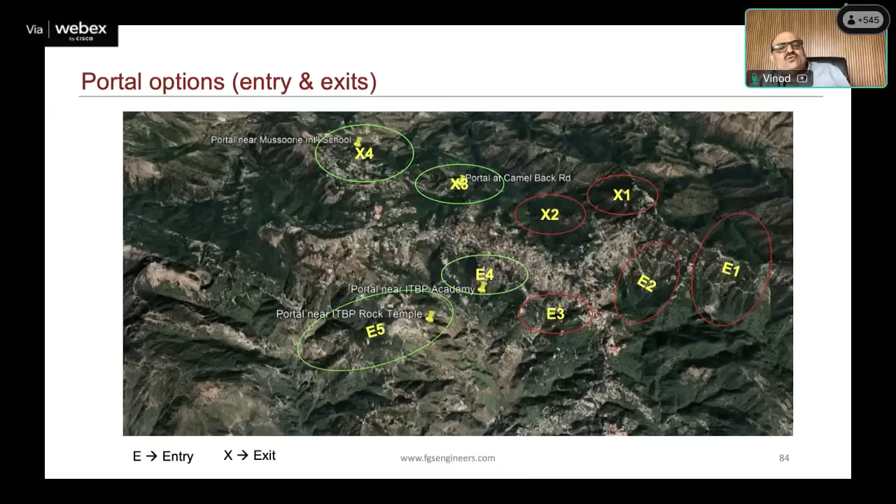So as below a ridge line you are, or as diagonally to a ridge line you are, those are the two best alignment options, which one should go through. Then you have to plan your entry zones. You have to plan your exit zones, which are the possible entry zones, which are the possible exit zones. Once you have planned those entry zones and exit zones, you have to go on site. You have to survey all those entry zones and exit zones. This is how it has to be done.

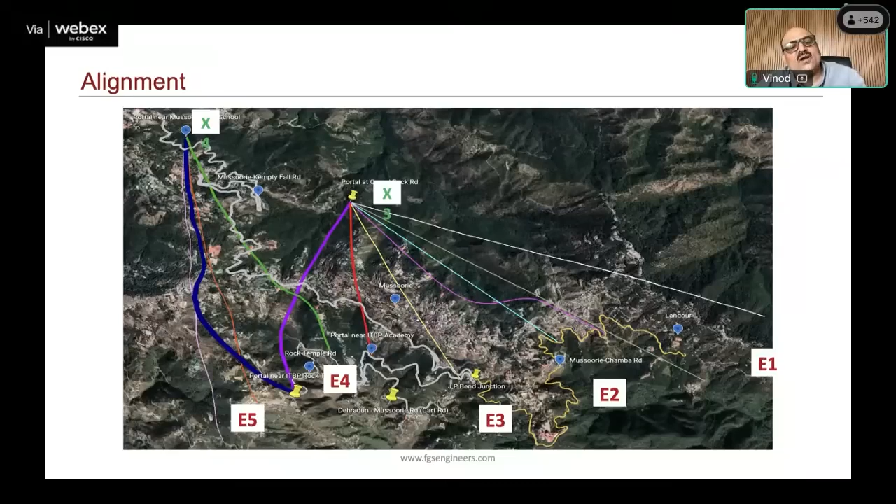Once you have done that, then you have to zero down to the entry zones which are more conducive, and you have to go and start looking for where your portal can come. It may not be the best of the geology, but in that particular area, it should be the best geology that you have to look out for. Based on that, you will have various alignment options. Each of these alignment options has to be studied, verified from the ground, and then you have to zero down to, let us say, 2 or 3. In this particular case, we zeroed down to 4, then we zeroed down to 3.

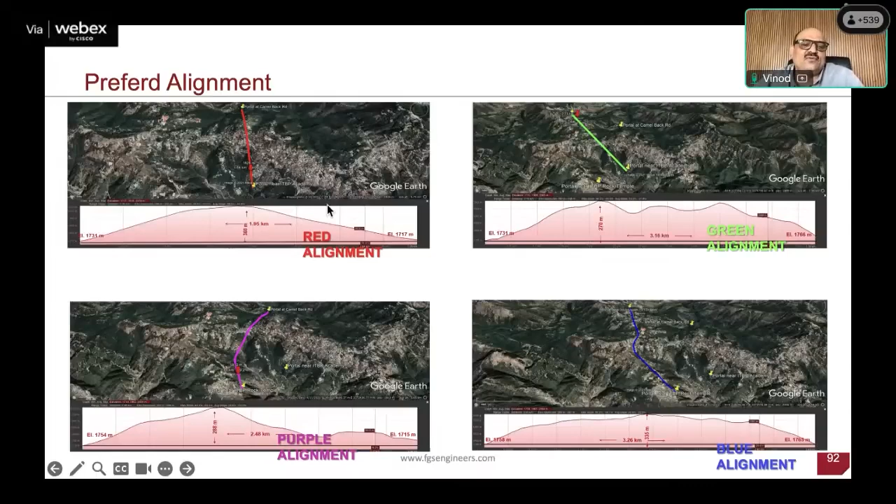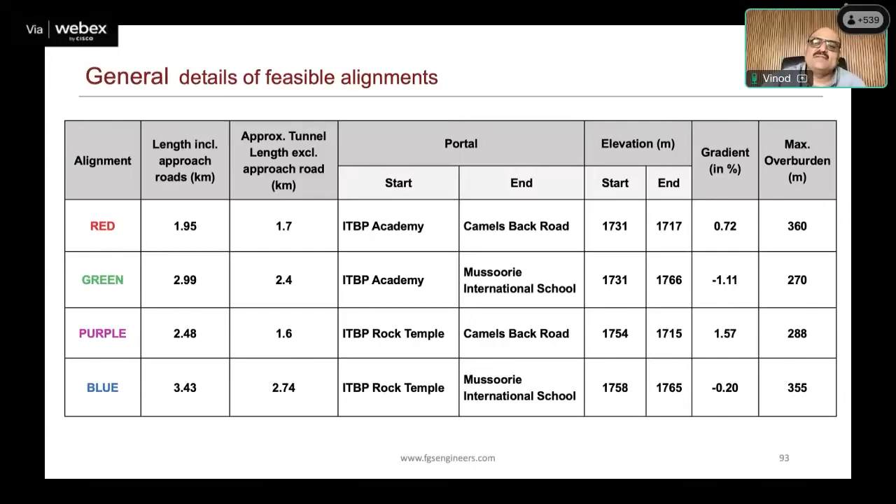You have to look at overburdens. You have to look at the length of tunnel which is coming, the geology which is coming, the traffic that is coming. So all that you have to do. After you have done that, then you have to look at the approach roads, what is going to come, what is the length, what is the implication of that. What are the maximum overburden, underburden, gradient, all that work has to be done.

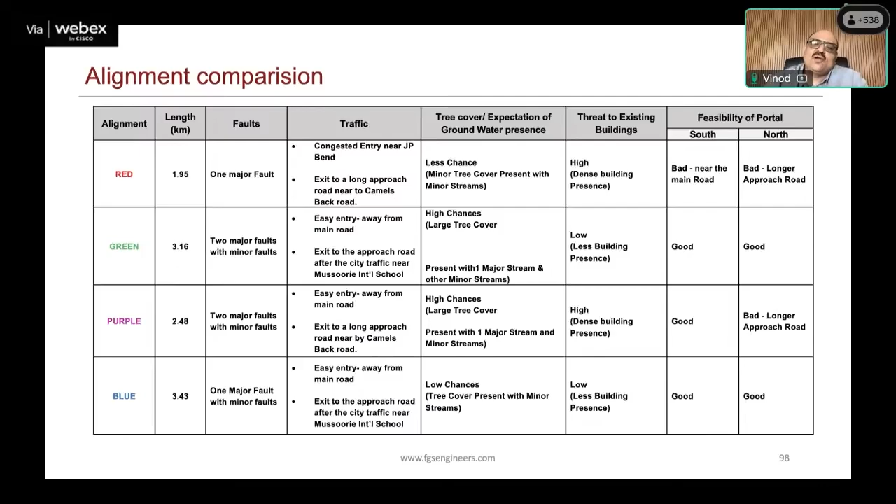Once that is done, then you have to compare each of the alignments. Each alignment has to be compared in detail with respect to geology. This is one table, but it has to be really compared in detail with respect to traffic, tree cover, water, building threats, contractual issues. Then you have to see which is the best one.

Then you start doing investigation. So at this stage, once you have done all these things, you require an approval. Once you have got this approval, then you are required to do geological studies, and after geological studies, you start your designing, and from that designing you will get your BOQs, you will get everything.

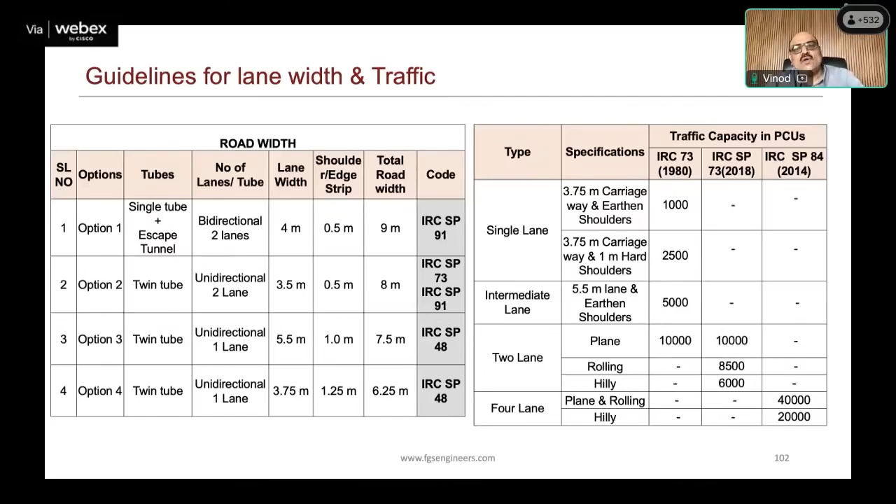Now, in most cases, once you have finished this, you come to the option of whether you require an escape or not, and whether you require a 2-lane or not. Now, important information I want to give you should be here in this tunnel.

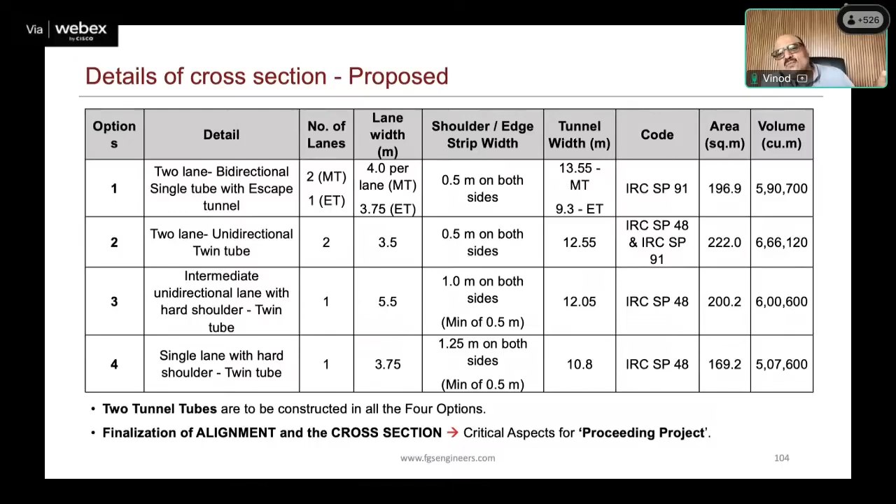Going for a main tunnel and escape tunnel is something which is very, very critical. If you ever have to go for a main tunnel and escape tunnel, it is always better to go for a twin tube, because if you look at the area of square meters of excavation, there is hardly any difference. Later on, if we try to make an escape into a main tunnel, it is going to be a huge cost and a huge implication. So either we take a risky decision of not making an escape, or otherwise we always go with the twin tube. That's one of the most beneficial decisions which needs to be taken.

Then, for each of these cross sections, this is what is shown. I think I need not elaborate on this. Once this presentation is shared with you all, you can look at the cross section.

Tunnel design is always about safety first, and emergency escape first, when you design and plan all the peripherals which are to be put inside.

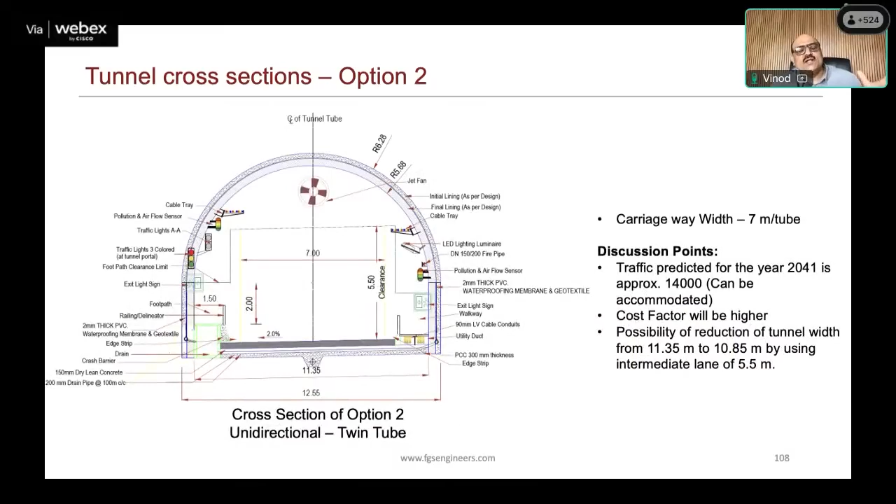Then there is a twin tube tunnel. So each cross section has to be looked into, each cross section has to be worked on, each has to be decided, and this has to happen in the preliminary stage.

Now we are into the last two slides of my presentation, and I will close it here. Once this is over, before you go for a detailed design, these are the decisions one has to give when the alignment is getting approved - whether you want 2-lane bidirectional, 2-lane unidirectional, intermediate lane, or single lane.

And as I have told you, we should always avoid going for a main tunnel and escape tunnel, because it does not give you a financial benefit.

Pavement camber is another important thing, because in a tunnel it is not like a road. If you have camber on one side, your whole drainage plan and everything shifts. So pavement camber and drainage are very complex inside a tunnel. In a number of places when you work on this, you will find in the DPR these things have not been taken into consideration, and during execution these problems are solved. This is very, very common in our industry, that drainage is solved during construction, and in a number of places we have faltered, and in those places those tunnels are still facing challenges.

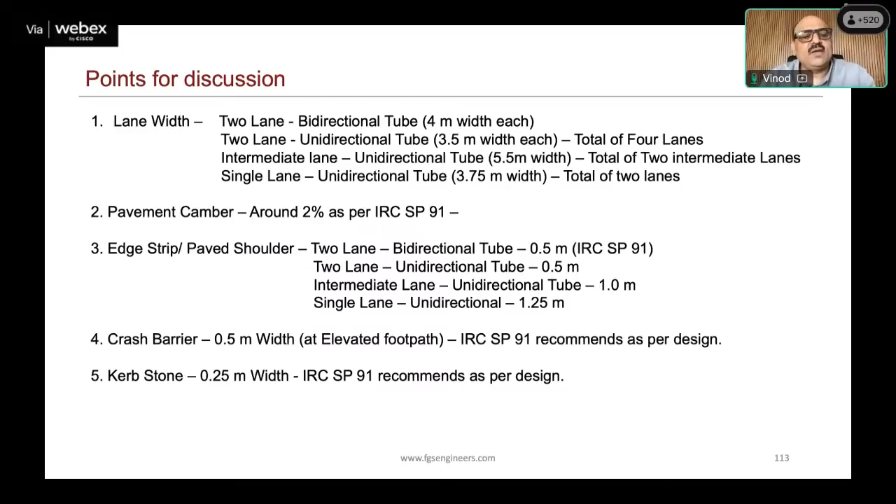Then you have crash barrier. I said elevated footpath - IRC SP 91 recommends it, but hopefully the revision should take it out. We should not have elevated footpath. You have to safeguard the people only by railing and crash barriers on the side. Then kerb stone.

Then footpath - I said raised, not raised. Then railing heights - if you are making railing heights, the railing should not be continuous. You should have gaps in between, so that in case of an incident, people can get in and run away. Otherwise, I have seen continuous railings being made.

Then cross passages at 500. Lay-by and refuges for parking - whether you require them or not is going to be another big cost, because you increase the cross section. So these are the points which you need to deliberate when these files are on your table, and you have to give a decision before the design starts.